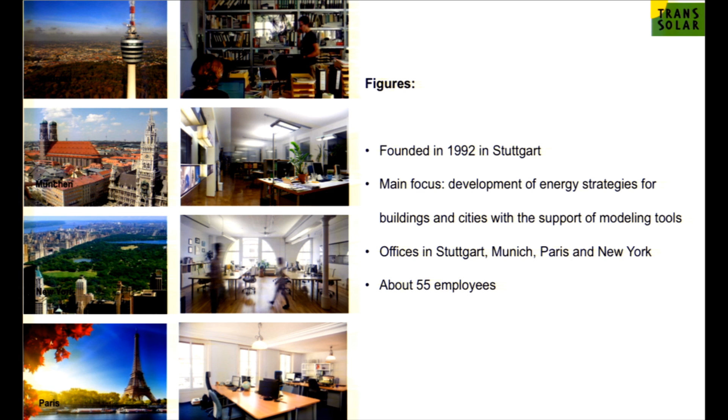We call it, and this is TU Munich, which is a little more than a hobby. It's my second life now, and keeps me busy, but it's kind of interesting to link our engineering practice with academics and the academic world and research in particular.

This is how we call what we do. We call it climate engineering. Just to give you an idea of what it means, we were invited in 2010 to give an installation at the Architecture Biennale in Venice. And we thought, what do we do?

We ended up with this idea to do an indoor cloud, because the cloud for us is the visualization of climate engineering. In order to get a cloud, you need a layer which is saturated, which has 100% humidity. And then when you get 100% humidity, you can spray in water, and the water does not evaporate, and it starts to appear as a cloud.

So that was the idea, and in order to make it float, we had a layer of cold air below. Cold air goes down, warm air goes up, and a layer of hot air above. So that was the basic idea.

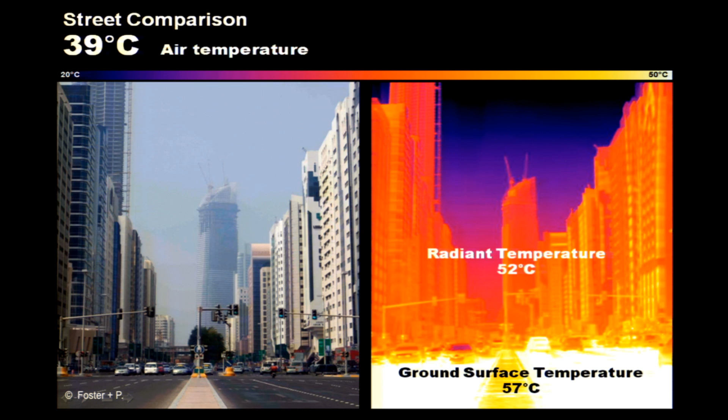Coming back to urbanism and climate in the urban environment, this is a picture someone from Foster did in Dubai, showing a main street in Dubai. What you see is that being exposed to an air temperature of 40 degrees, people see a radiant temperature which is on average 52 degrees, plus people are exposed to the sun. So the temperature people feel is somewhere in the range of 50, 60 degrees.

And this is all man-made. So whatever we do in this environment, we make it worse. I fully agree with what we have heard before, that architecture can make a change to the good or to the bad. In this case, it was unfortunately to the bad, and the question is, what do we need to do?

I think we need to better understand how we influence climate. In addition to the urban climate and the urban heat island effect, we see global warming and a higher frequency of heat waves. We had another heat wave this year, and we recognized in 2003 that our cities are not resilient for those heat waves. The statistics show that up to 40,000 people died in this heat wave, and Paris and France got affected the most.

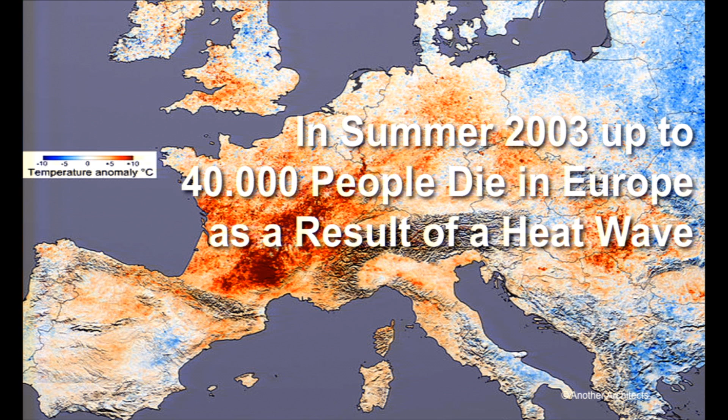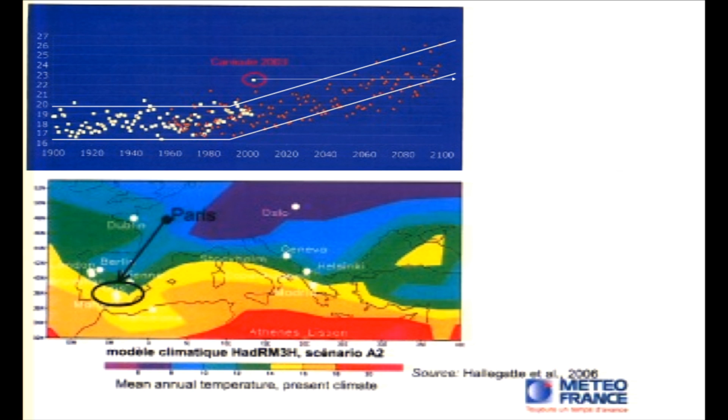In a competition called Météo-France, where we worked with Atelier 10 architects in Paris, we also had Météo-France in our team. That was quite interesting because they showed us this diagram.

In this diagram, you see the upper part displays the average summer temperature in downtown Paris over the past 100 years. Then all of a sudden, you see the summer of 2003, which is much higher up here. Then you see what's predicted in terms of global warming. The summer of 2003 is going to become the very normal summer in 2050, and the coldest summer they're going to have in 2100.

So Paris is going to get the climate of Sevilla with a completely different city fabric. Sevilla had been developed around this climate. Paris had been developed around another climate.

So the question was, if we think about the greater Paris area—this was the competition—we also have to think about what can we do, about climate mitigation. Together with Météo-France, we developed simulations, and I'm not going to go through the details.

But I think the basic message was that if we change the reflectivity of surfaces, if we increase vegetation in the city seriously, if we have green roofs, we can basically mitigate what's going to come with global warming. I think that's the message.

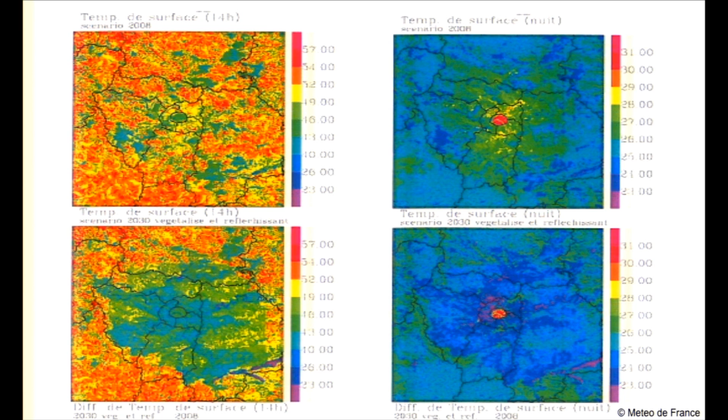So it's a design issue, and it's in our hands—or basically it's in your hands, because we're going to retire pretty soon. So this is what you're probably going to do over your career, to fix what our generation has messed up.

And the generation before us. But I think that's the good thing. It's a design issue, but we need to have a master plan. Every city should have a master plan for how to deal with these things.

And there's another thing we learned when we worked with Météo-France in Paris. During these hot summer days, under peak conditions, downtown Paris had only 1 degree more than the suburbs.

So when they had 38 degrees in the suburbs, downtown Paris had only 39. So the urban heat island effect during peak day conditions was only 1 degree.

Whereas at nighttime it was 10 degrees. So whereas the suburbs cooled down to 20 degrees, downtown Paris stored so much heat in the streets, in the parking infrastructure, basically a lot in the car infrastructure and the material of buildings.

So the coldest temperature during these heat waves was 30 degrees at 6 o'clock in the morning. If it gets to 30 degrees at 6 a.m., the buildings cannot cool down. They do not have air conditioning.

So our climate design in housing in Europe is that you cool down your thermal mass at nighttime. Now, if the urban area doesn't cool down, your buildings cannot cool down—the buildings get too hot.

So that's the result: much more than peak day conditions, it's the nighttime temperature we need to work on. So again, this is a design issue.

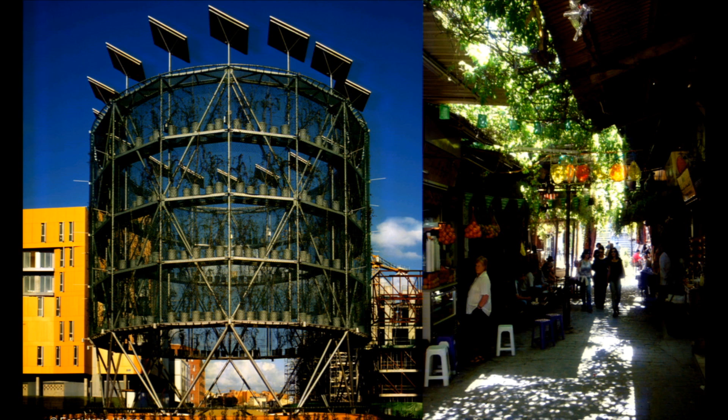This is an image from Ecosistema, from Madrid, where they installed this on a plaza. And it creates a cold spot. Instead of a hot spot, it creates a cold spot in the city, and people gather—it became a real gathering place.

And what inspired us when we worked on a project in Damascus was actually this one. It's an image from Damascus, and it's a souk—basically a shopping mall in Damascus.

And in this hot climate, people live outside. This was really inspiring, and we started to think about how you can create these comfortable environments in this hot climate.

And it makes them happy, even though it's really super humid and still super hot. And inside, it was overcooled to 18, 20 degrees. There was nobody inside—everybody was sitting outside in this environment.

And we start to recognize that—not only we, a lot of people start to recognize—that in an outdoor environment, people accept a much wider range of temperature and humidity.

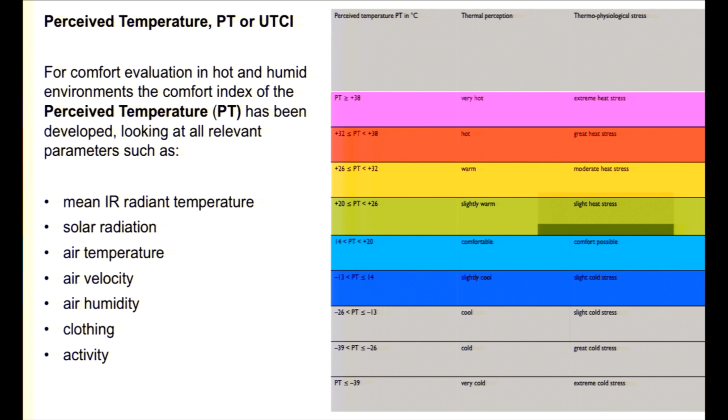And this all goes into an equation which allows you to calculate the perceived temperature, or UTCI. There are different standards, but this is the temperature people perceive, and then you can classify it and put it into different ranges, and try to avoid great heat stress or something like this. And all of a sudden, with those equations, you're able to calculate those environments.

We followed up on Damascus, for instance, and figured out that it's a perfectly comfortable environment: being in the shade, having some radiant cooling from the trees, some evaporative cooling also from the trees, and having some air movement. The same thing we calculated with Kuala Lumpur, came to the same conclusion. So I think these are the tools we have, and we need to use them to design different places.

One I want to show you is also in Paris, where we worked with TVK architects from Paris. It's a redesign of the Place de la République. The toolbox was applied and programmed into the plaza to create a better environment, to make it more beautiful, but also more comfortable for people, and ideally have a cold spot that also acts into the neighborhood.

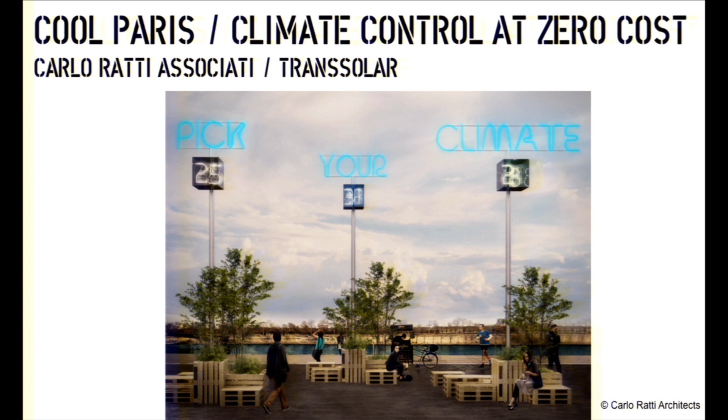So we use this because Paris is also affected, for an installation which we have up in Paris right now. We worked with Carlo Ratti from Turin, who is also a professor at MIT. The installation is called Cool Paris. Basically, as the sign says, pick your climate.

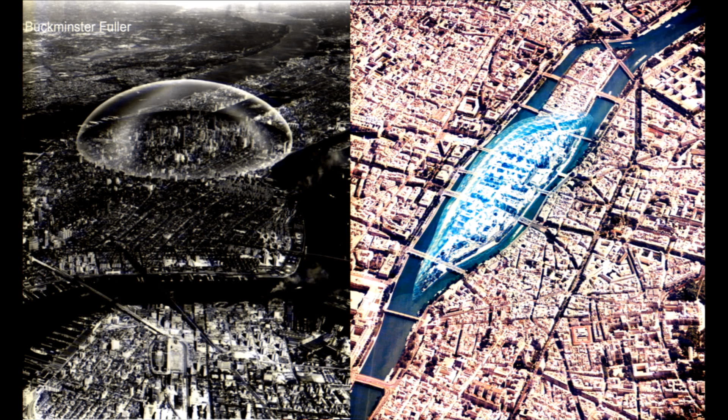The idea is we found a material developed by scientists from Stanford University which has the inverse properties of glass. It blocks shortwave radiation but transmits long-wave radiation. So even during the day, you emit long-wave radiation to the space, which creates a cool environment even on a sunny day.

Buckminster Fuller created this image where he asked, what if we have a kind of greenhouse above Manhattan to deal with the cold climate of New York City in winter? It was a very ambitious but also crazy idea, to be under such a glass dome. We used the same idea, saying what if we have this island in Paris and put this foil on top of it so it cools down - not to deal with the cold climate in winter, but to deal with the hot conditions in summer.

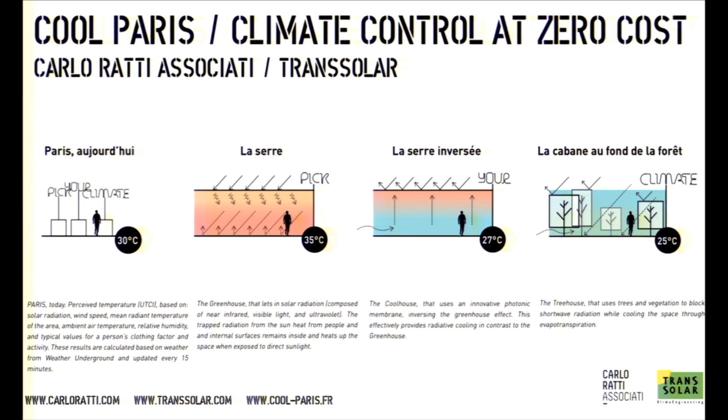Don't take this literally, don't take it seriously - that's not our idea, to cover pieces of Paris with foil. But maybe a plaza, maybe a shading structure on a plaza. It was a little provocative. What we do is take the actual temperature measured in Paris and calculate what it would mean if we were in a greenhouse, what it would mean under those conditions if we were under trees - we called it the tree house - or under this foil - we called it the cool house. At every moment in time we calculate all those temperatures and display them to show people to what extent we can manipulate climate to make it more comfortable.

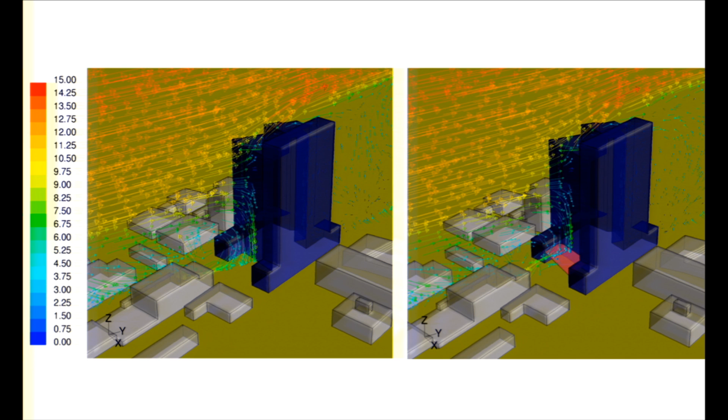But I think these microclimate issues are not only relevant when we talk about urban design, they're also relevant for building design. This was a high-rise where we worked with KPMB architects, in Winnipeg, a very cool and windy place. We wanted to open it up to the south, so the building could catch all the sun from the south, but there's also a big wind coming from the south. As a byproduct, we got this huge downdraft, creating a very unpleasant environment at the plaza. We did lots of modeling, but finally found that this canopy solves the issue.

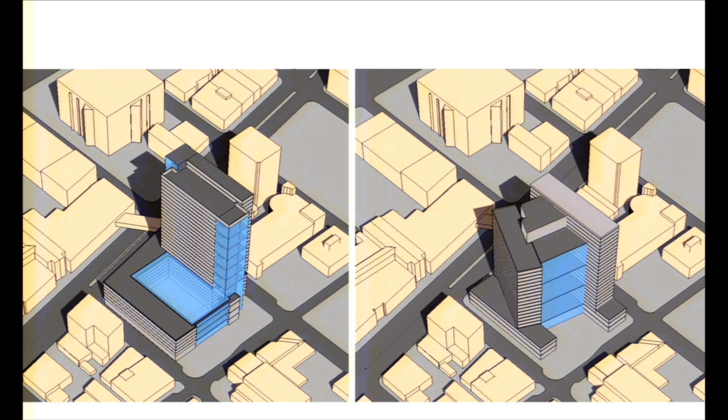We also did the same analysis with the sun—we didn't want to shade Air Canada Plaza here in summer, and compared it to other massing strategies. So this is the canopy, this is the plaza. I think it's really important that we as designers, architects and engineers, think beyond our own building. It's not necessarily only big buildings which can create big issues. Big issues with downdraft are seen in many cold cities—New York has serious issues, Toronto has serious issues with downdraft, but also Frankfurt and other places.

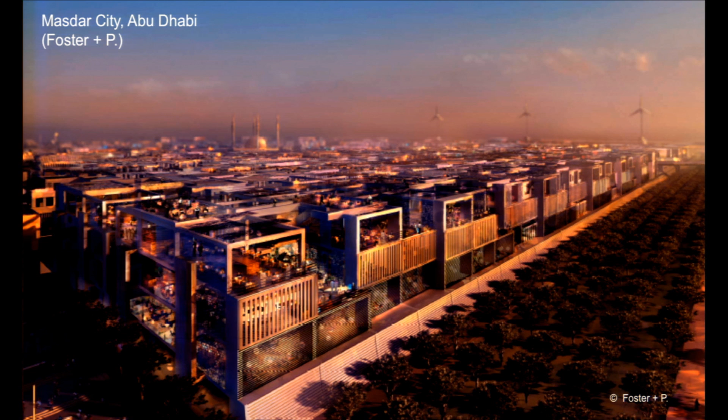So finally, talking a little bit about Masdar City. I'm not going to talk much about it. We worked with Foster and Partners on the original master plan, with the idea to create a carbon neutral city for 60,000 people in Abu Dhabi. Of course we can have all these debates about whether we need a new city in the middle of the desert—that's not the question. The question for us was, is it feasible for reasonable costs within these unbearable conditions? Because I think it's the worst climate conceivable—not just a desert climate, not just hot, probably the hottest and most humid climate on this planet.

So we said, if we can design a carbon neutral city where all the energy is generated on the land of the city—no offshore wind farm somewhere, no green power purchase—if this is possible in this climate, then it's possible everywhere. Coming back to the previous talk about Bo01 in Malmö, it's really embarrassing that we haven't developed any new and better neighborhood in Europe since, this was at least a try in Abu Dhabi.

So this was the carbon calculation at the end—a long iterative process with a big design team. I won't go into the details, but the biggest contribution was from the energy efficiency of the buildings themselves. Having all buildings covered with PV plus windmills, etc., reduces overall carbon emissions by something like a quarter. But the energy efficiency of the buildings reduces carbon emissions by more than 50%, 56% in the overall balance. No individual traffic, no car traffic—that was the premise.

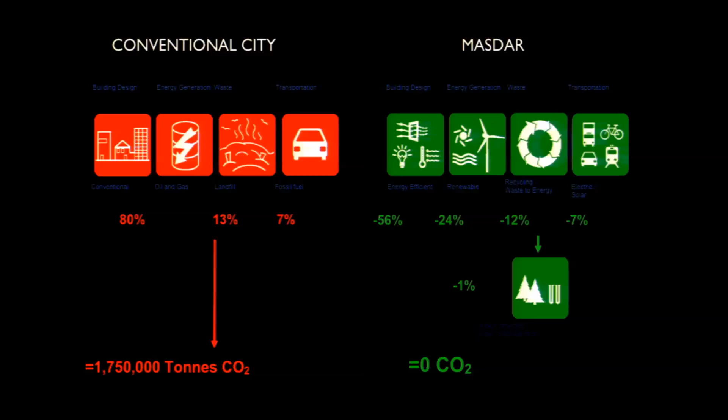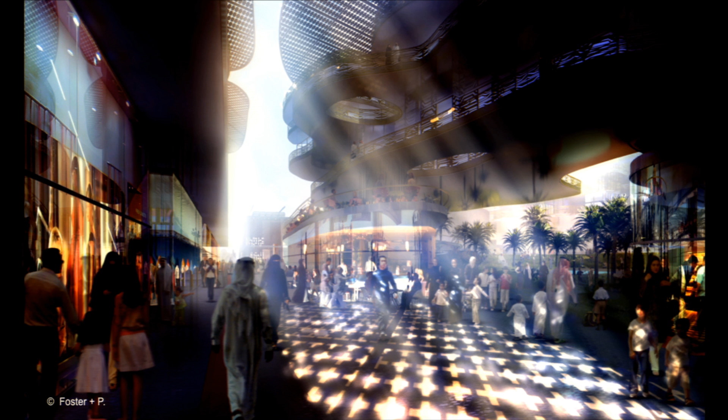But the thing that's not much talked about, probably the most interesting aspect in Masdar City, is the outdoor comfort. We did most of our studies on massing strategies, on urban form, on how to create—within these unbearable conditions—an optimized city environment where people can spend time outside. If you remember the first image I showed from Dubai, this looks very different. We did tons of modeling: wind modeling, shading studies, etc.

I think what happened in the meantime is that cars came in—they couldn't resist the pressure to have cars in the city. More infrastructure, streets became wider, and the whole comfort strategy was falling apart. This is what happened. Now, I don't want to say it's the only way to do it—you could also have shading structures, but they need to redevelop a new strategy. So this is how the overall master plan looked like.

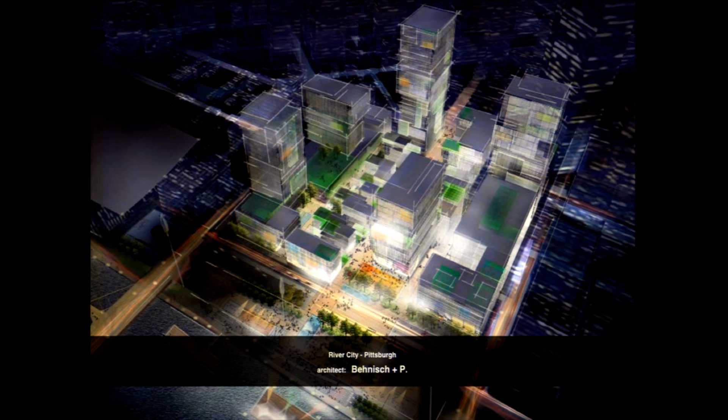I want to finish with—we've heard so much about Pittsburgh today, so I thought I'd add another project from Pittsburgh, since it's really a nice and interesting city. In 2007, we worked with Behnisch Architects from Stuttgart, close by, and a Danish architect on this massing, this development in downtown Pittsburgh, right in the Golden Triangle, right downtown. The idea was—if I remember right, only 3,000 people remain living in the Golden Triangle, where the two rivers come together, the downtown area.

A city of 600,000 people, only 3,000 people live downtown, and the whole competition was operated by the Cultural Trust. The intent was, how can we maximize people living downtown—how can we create a nice, vibrant city while maximizing housing and the amount of massing to get as many people downtown as possible. These are the strategies where we worked intensively with Gehl, with the Danish team, on climate and massing. The idea was that 8th Street should become a pedestrian street, connecting downtown to the riverfront, where there's a highway right now. We wanted to cover the highway so people can hang out at the riverfront—probably a great place for you to open the next cafe.

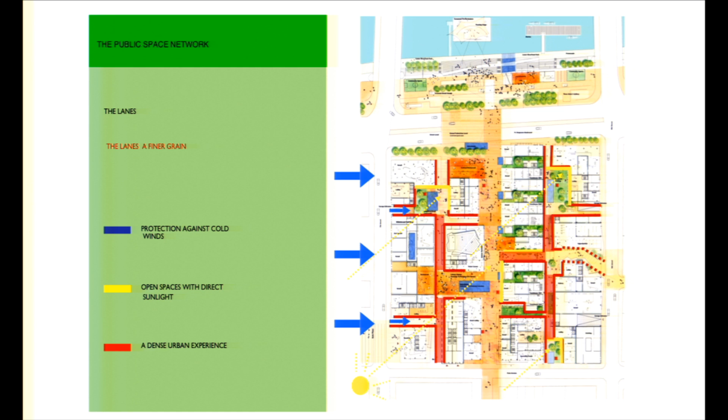You also see that they have a really strong wind in winter going east-west. So this is north-south, but we have small lanes with offsets to the east and west so that we block this cold wind in wintertime. But also we always have these nice little neighborhood pockets, small pockets in between the housing.

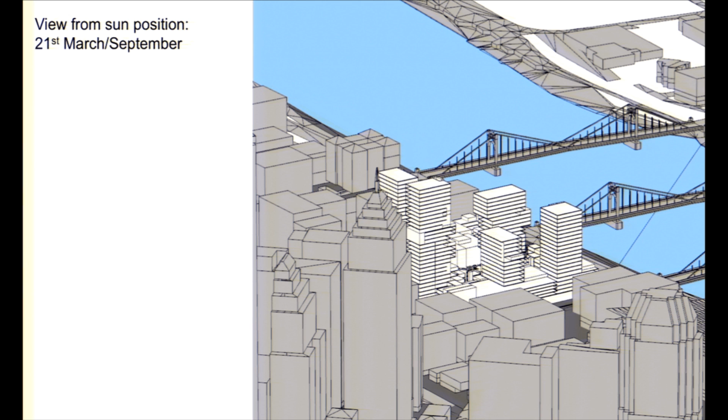It was always important that we get sun in intermediate season and in winter into those pockets. So we were running those models, and this is just the final one. During the process we did many of them, showing the development from sun position. Everything which is white here should become the new development, and we look at it from sun position, so it's a little weird to understand. When you're on the sun, you don't see any shade. That's the nature of your position.

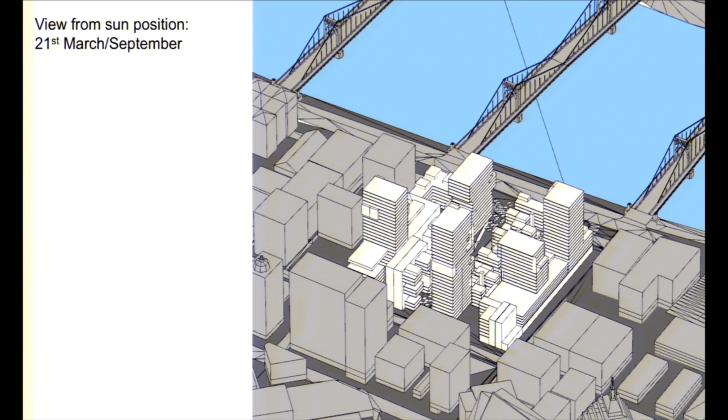So you show a shading study where you don't see any shade, but everything we see at this moment is exposed to the sun. So we look at it around 9 o'clock in the morning, then 10 a.m., and you see those pockets are already exposed to the sun. This is 11, this is noon, where we get sun into 8th Street. Then in the afternoon, 1 p.m., 2 p.m., all of a sudden different pockets are exposed to the sun, so that we always have different qualities during the course of the day in different areas.

This looks very simple and logical, but it's a result of a design process which takes weeks and months, where we sit together and have styrofoam towers which we shift around. And then we go back and run the models and see what it does.

I think it's really important, and what we figured out in this project as well as others, is that if we have these point towers, they cast a small shade, and there are always moments in time when you get sun into the public realm, whereas in Europe we still tend to build block structures like the Berlin block or the Paris block, where there is no sun going into the courtyards. North America is much more relaxed about height than we are in our European cities, less dogmatic about these urban forms, and this gives us many more possibilities if we don't continue with a similar height for all the buildings.

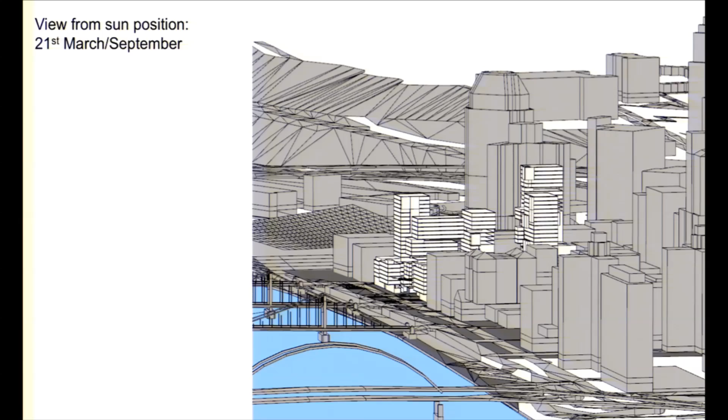So this is a final rendering we did. We won this competition. We were really lucky and wanted to build, and started to negotiate contracts already.

But then there was the crisis, the housing crisis. This is a weird thing about funding of those kinds of projects in North America: they are funded by the profit of selling those apartments. So if you don't sell any apartments, there's no project. The whole project fell apart with the crisis.

But anyway, the Cultural Trust, the city in Pittsburgh, they still talk about this project, and whenever we are in Pittsburgh they're still talking about maybe bringing it back onto the agenda. Anyway, I think it was a nice project, and we still like to show it because it's so holistic.

It's about these social sustainability aspects, getting people back into the city. It's about energy—we also did a whole energy strategy on how to supply energy for those buildings. But it's also about quality of the public realm, in terms of making it vibrant, but also in terms of comfort for people to enjoy the public realm. That's why I really like to show this.

So to finalize, that's what we try to do at the university, bringing those things together. I think Brian mentioned this thing of density, and there was a brief discussion about density today. It's true that from all environmental aspects, density is always good—the higher the density, the less energy for transportation, the better the infrastructure, et cetera.

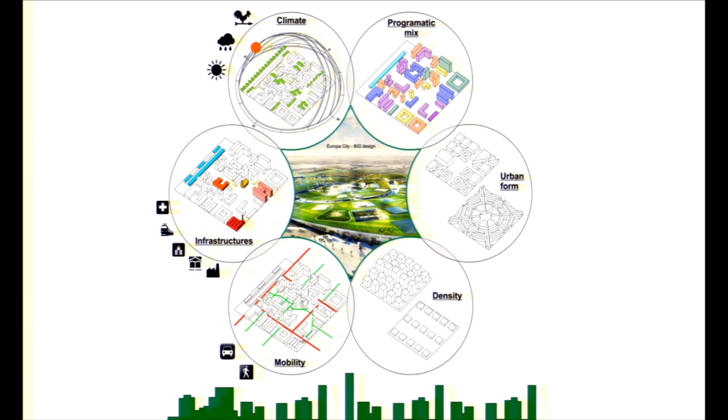But there is a moment when the climate becomes too hot, when the city starts to overheat. This also depends not only on density but also on urban form—we know that single towers are better than a block structure, things like this. So we want to study this. We're working on models to bring this all together, to try to find the tipping point where density does not work anymore, in order to create spaces which are finally used like this, hopefully in the future.